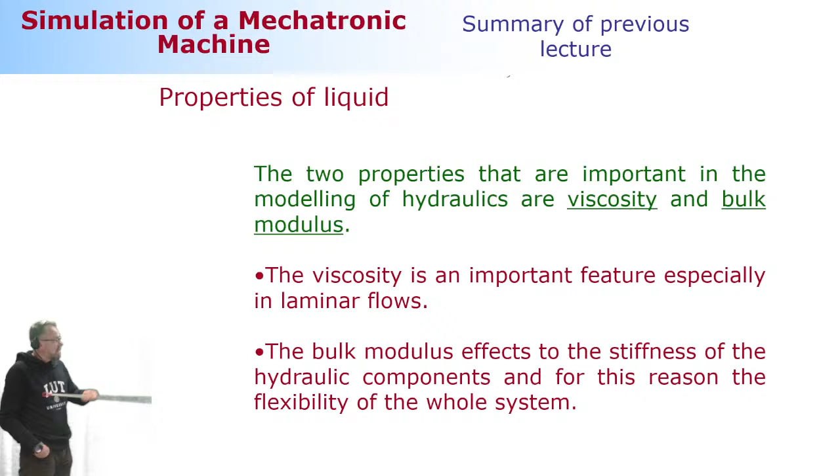The viscosity is only important if you have a laminar flow. We discussed the bulk modulus, completing this by first looking at a unit size container. We realized that the bulk modulus is a ratio between the pressure difference versus the volume difference. As the volume gets smaller, the pressure gets bigger, the volume difference being negative in sign.

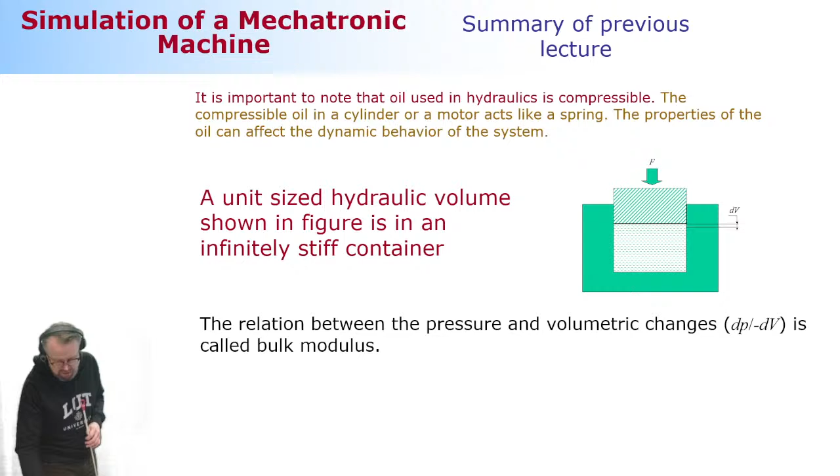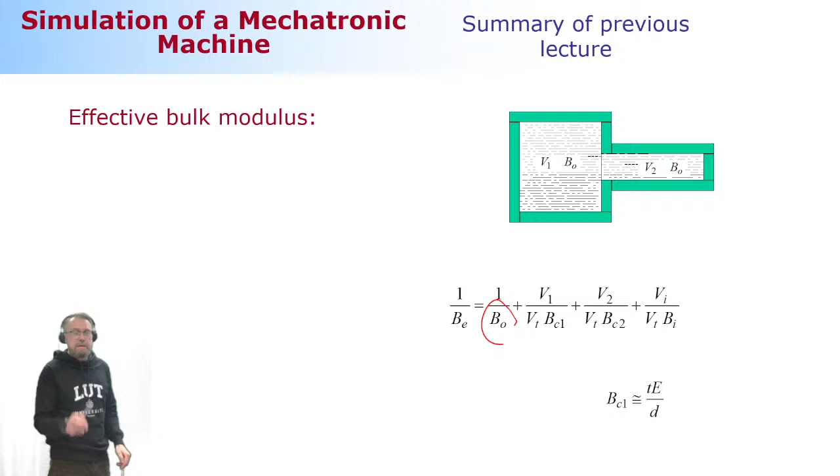When you try to generalize this to any size of volumes, and take multiple volumes simultaneously into account, you can compute something called the effective bulk modulus. The effective bulk modulus takes all the sources of flexibility into account. You can compute that, in a case like two containers shown in this figure, by first taking into account the flexibility of the fluid. This is actually a function of pressure and temperature, but it's very often assumed to be a constant value.

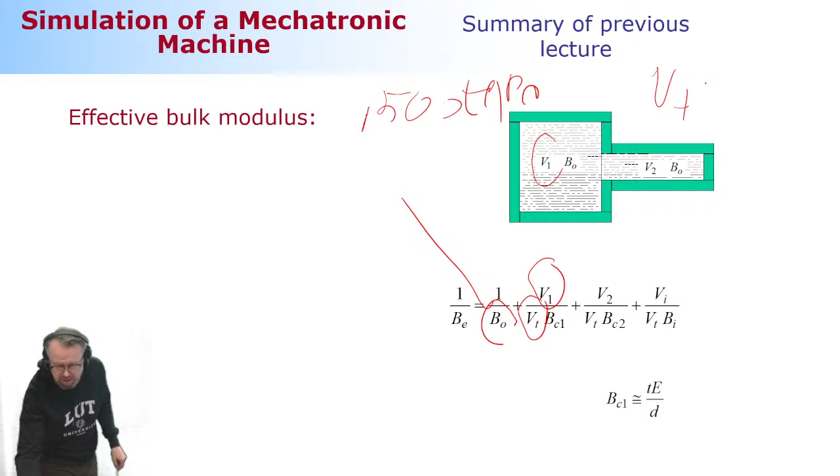So it's going to be 1,500 megapascal, which is a typical amount of bulk modulus that is being used in simulators. Then you have the next component, which is the size of volume 1 versus the entire volume of the system you look at. Entire volume is going to be volume 1 plus volume 2.

Right, and then you're going to take this flexibility of the first container into account. If it is a steel-made container, like a hydraulic cylinder, you can make an assumption by using this very simple equation where you have diameter of your cylinder, wall thickness, and the elastic modulus. This is going to give you a rough estimate about the flexibility of your container. Okay? Then you have a second container, so you can do the same.

And then finally, you have here how much dissolved air you have. This is the hard component to estimate because in reality, it's almost impossible to know how much exactly you have dissolved air in your system. But this is something that you can give a shot and try how much effect it's making.

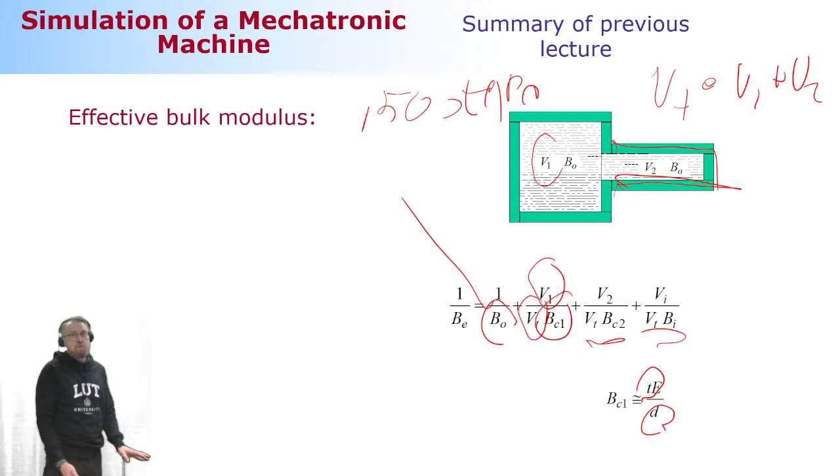And one thing that is not mentioned here, if this container is not steel made, but is like a rubber hose, that is typically the one that is reducing the effective bulk modulus very significantly. And here was an example of how much exactly that is reducing.

This experiment is such that this y-axis here is effective bulk modulus. But look at the numbers. So this is megapascal, and this is like 800, 480 megapascal, so it's reducing quite significantly. And this is because of the hoses itself. Hoses, even though they have a steel net, they're introducing quite a bit of flexibility to the system.

And if you have a desire to make your hydraulics more rigid, one simple way to solve the problem is to reduce the hose lengths. This is one thing that helps you. Sometimes you need to play a little bit with the Eigen frequency associated to hydraulics to make sure that they don't overlap the same region as the natural frequency of mechanical structures. Then you can play with the hoses and so on and so forth.

Yes sir, do you ever want a bouncy system with low bulk modulus? So when can I need the low bulk modulus? When does that happen? When you want, is it ever wanted? Ah, that's a good question. Yeah, that's a good question. I get emotional here because we have communication. We have a great level of friendship here, do we? No hugging, I keep it at level, but it's a fantastic question.

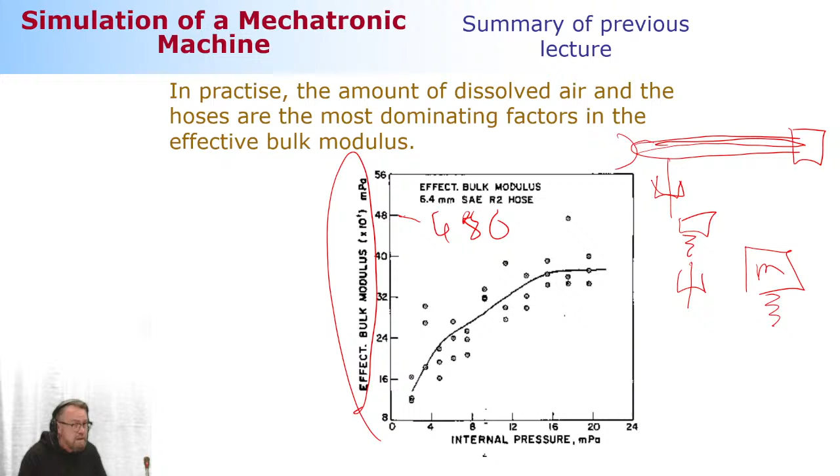Okay, so you might have a system like this, so let me put it here. If you have a simple crane like this, you have a mass at the end, and then you have a cylinder here, this is your hydraulic cylinder. Because of the flexibility of this mechanical component, you could simplify this structure in the sense that you have a hydraulic cylinder, and then you have a spring here and the mass. Now, when you look at this hydraulic cylinder, I'm going to make one more drawing here. This is going to be the mass, then there's a spring, this is a mechanical spring, this is what comes from the flexibility of this simply supported beam.

And then you have here a hydraulic cylinder. Let me describe the hydraulic cylinder in a way that there is actually a piston, and this fluid here is a spring, and here there's another spring. Now this is one flexibility as a total that is coming from hydraulics, and this is the one that is coming from the mechanical component. Now the big problem could happen if the frequency of the hydraulics is in the same area, same neighborhood, as the frequency of the mechanical flexibility.

So one needs to go another place. So which one can go? Okay, flexibility of the mechanical structure, probably there's nothing you can do about that anymore because it's already an existing structure, so you cannot touch that. So the one that needs to go, one needs to move away because they don't get along well if they're in the same region, is the hydraulics. So what you can do for hydraulics, you can either increase the flexibility or decrease the flexibility.

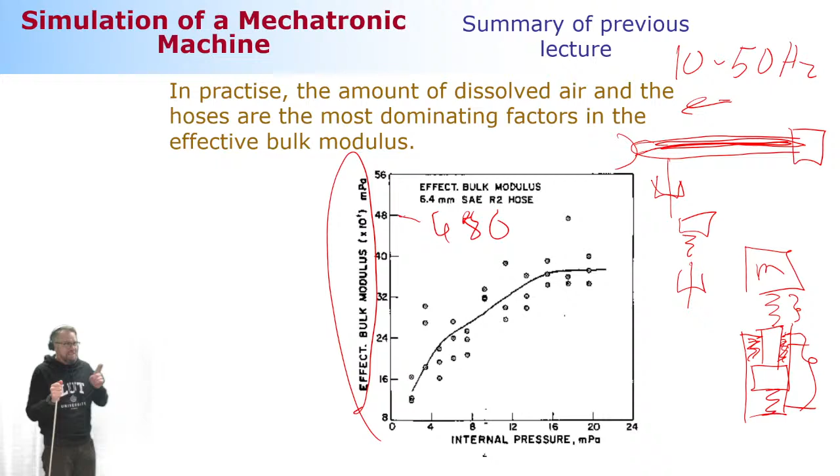Really nice. Let's look at the natural frequency business a little bit. Let's go back to this example we looked at a little while ago, with the difference that now there is no mechanical spring. This is just a mass on top of the hydraulic cylinder. It's almost like the example we looked at before, except this mechanical flexibility is assumed to be non-existing. So it's only the flexibility that comes with the hydraulics.

Now, how can you compute the natural frequency of a system like this? The natural frequency is always a relation between the stiffness and the mass. Stiffness we need to figure out one way or another. Mass is going to be very simple in this case because here it is. This is our mass. So the only thing we need to figure out is how is the stiffness.

We know that the bulk modulus is closely related to stiffness. How can we compute this in a way that it actually is a spring coefficient, the way it is needed in this equation to compute the natural frequency? Stiffness, we know, is the ratio between the force and the displacement. That's the definition of stiffness.

So if it's about the ratio of force and displacement, let's look at how we can compute the force changes, how we can change the force in this system. Now comes something I haven't explained earlier, but it's good for you to be aware of: the force produced by this cylinder will be computed as a force that tries to push this upwards. This force is the pressure applying on the piston side multiplied by the corresponding cross-section area. That's the force moving the system in this direction. So this force is simply P2 multiplied by A2.

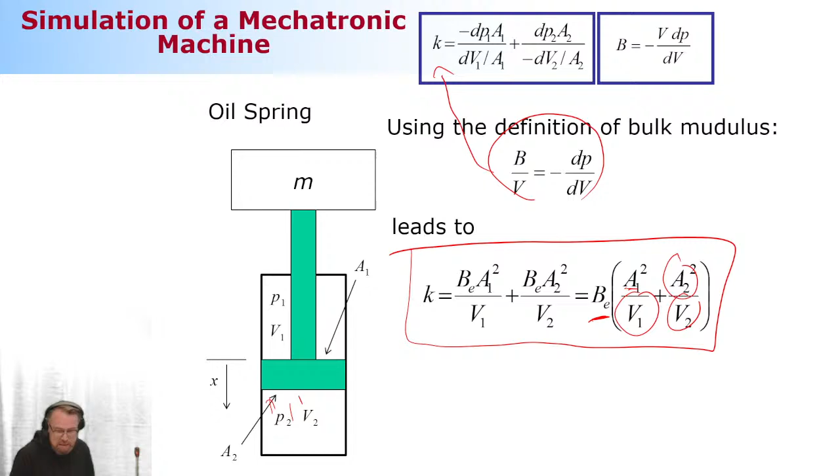Here is the effective bulk modulus, the one that describes the flexibility. Then I have the cross-section area that corresponds to the piston rod side, and the cross-section area that corresponds to the piston side, along with the corresponding volumes. This is how you compute the stiffness, and that's how you compute the flexibility. You simply take this value we computed, put it here, take a square root, and you can compute the natural frequency of the system.

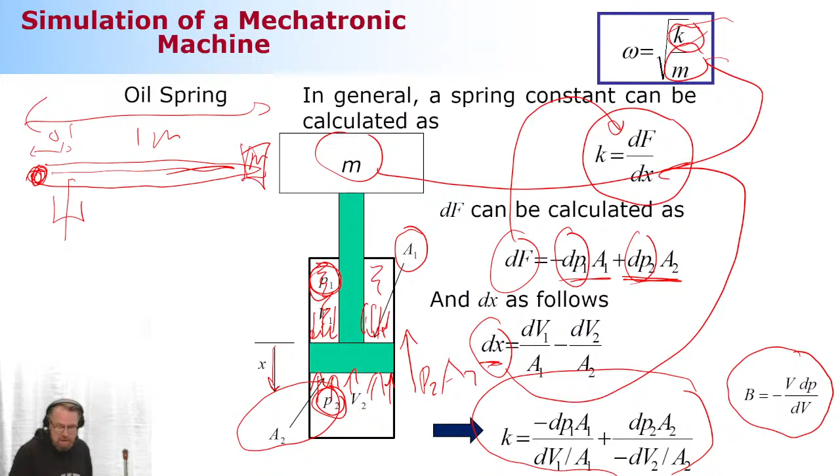Here's my question to you, first in class quiz. Bulk modulus in hydraulics describes: force produced by a cylinder, flexibility, compressibility of hydraulics, oil amount in a circuit, or number of components in a hydraulic circuit. Only one is correct, but which one is it?

So what does our YouTube say? Not YouTube, but the WhatsApp chat - is the WhatsApp going hot? Not yet. No one is saying anything in the WhatsApp. Are they saying what the WhatsApp community is voting for?

B. So they're voting for B. Somebody has a high level of self-confidence voting for B and making it visible for other students. Can you think about this a little while and we get back to this momentarily?

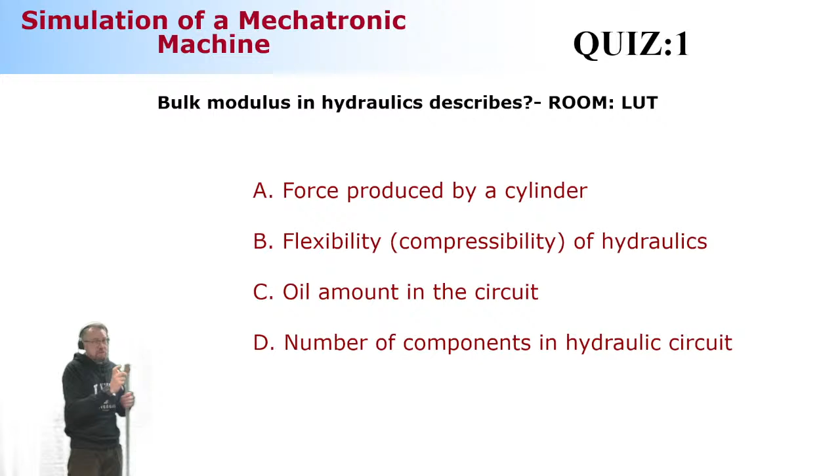One thing that I did not mention when I started hydraulics a week ago is extremely important: you need to understand the drawing symbols of hydraulic components. I assume this is all clear to you, but if not, this is going to be a little difficult. We don't touch that many components though.

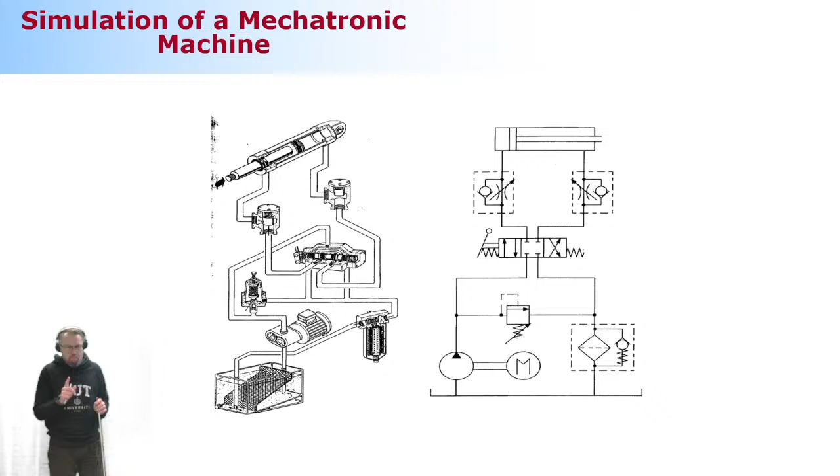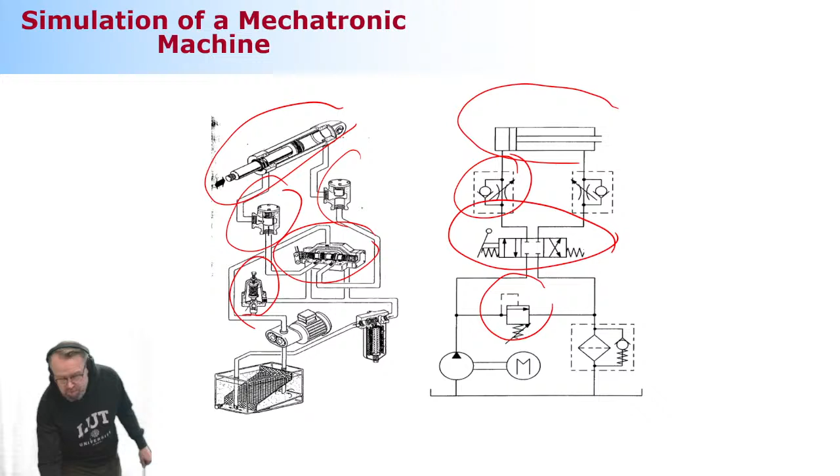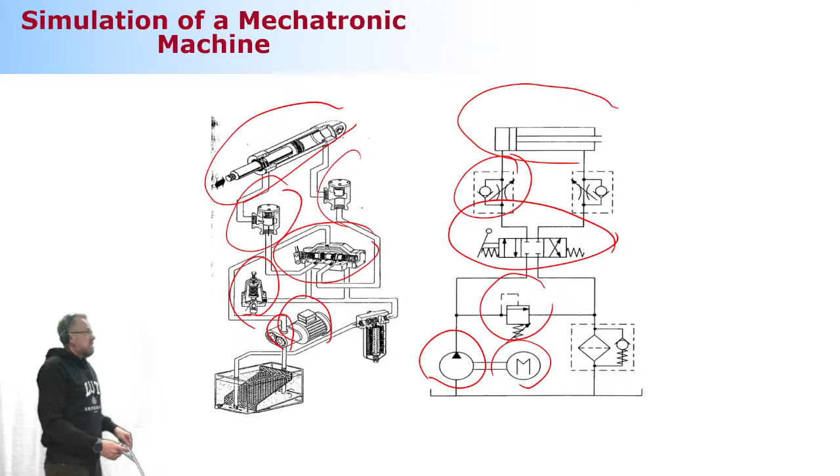When we say hydraulic cylinder, which physically looks like this, we draw a symbol like this. When we look at a direction valve that physically looks like this, we use a drawing symbol like this. These are the symbol throttles - they look like drawing symbols like this. This is a pressure relief valve, going to be this guy here. Pump looking physically like this, drawing symbol like this. Motor is looking like this - is this one. So that's how we're going to play the game: we don't show how they physically look, but instead use these drawing symbols.

Shouldn't be too difficult. If you're feeling shy about that, you can take a look at any literature on hydraulics you want, and it will all become clear in no time at all.

The last thing we need to touch before moving on to the most important subject matter in hydraulics is viscosity - not important. Why? Because the viscosity only comes into play when you have small pressure differences through the orifice or throttle, which is not common, particularly in mobile machinery and mobile hydraulics where pressure differences are lots, for sure more than 10 bars. Then it's safe to assume the flow type is going to be turbulent flow, not laminar flow. We'll touch the different flow types later in my class, if not today then next week.

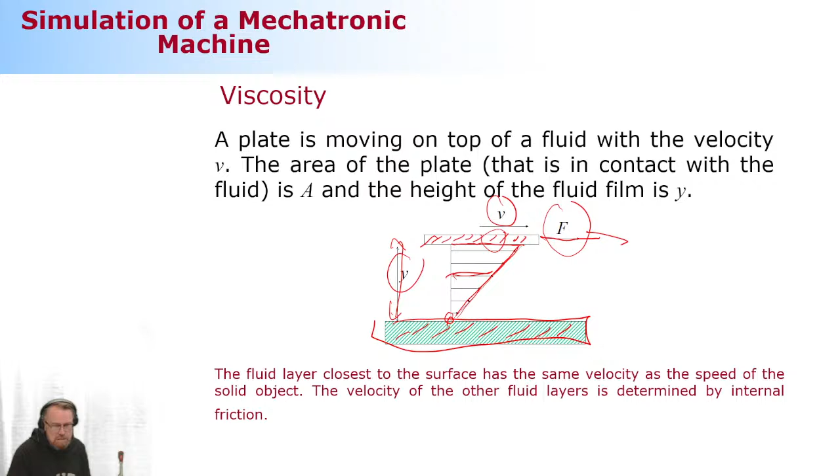Now what we're going to do is when we start to look at the closure, we're going to pay close attention to the force itself. Of course, the force that is needed is coming from this equation.

In this equation I have the cross-section of the plate, the velocity that I'm running, and how thick my fluid layer is—how much fluid I have between these two objects: the one standing still and the one moving with velocity.

And an additional component in my equation is the absolute viscosity. This absolute viscosity describes the friction property.

It's pretty much how much this fluid is collaborating with you. If you need very little force, the fluid is collaborating with you—not resisting much about the motion. Whereas if it's very thick material, you need a lot of force to drag this plate at a certain velocity, because the particles and the viscosity are fighting against you, trying to resist the speed as much as they can.

This one here is viscosity—that's what we're looking for. When we're looking for the viscosity, typically we simplify this equation by getting rid of the cross-section of the plate and the force itself.

That can be done by using the shear force. This comes from the strength of structures—copy-paste. Shear force strain is force divided by cross-section. When you do that, you can write it like this.

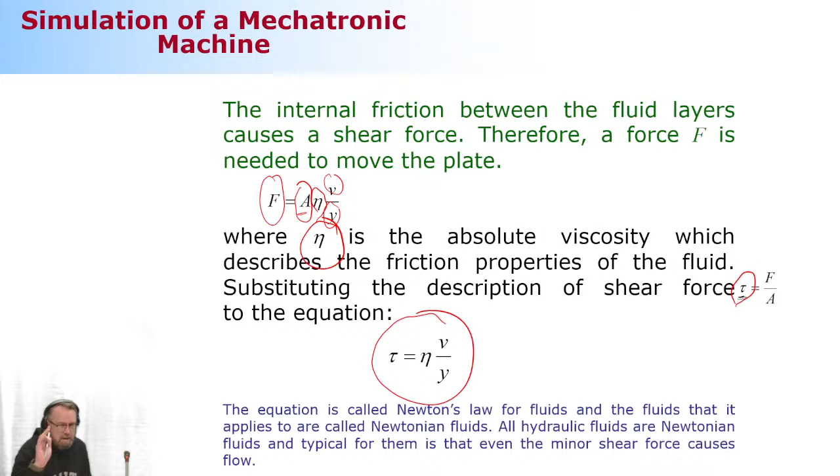Now, absolute viscosity is not really being used—it's something you don't typically find in the literature. So what is used instead is called kinematic viscosity, which you get by dividing your absolute viscosity by the density of your fluid. That's something we can actually use.

It's not often used this way. When you want new oil for your car, for your braking system—well, I'm not sure about the braking system, but at least for changing your car's oil—you typically look at viscosity using something from the Society of Automobile Engineers, and they use units associated with these SI units, like the cSt shown here. This is the one that's very common. When they say 'I want oil from 0 to 30,' they're referring to the Society of Automobile Engineers rating.

But when you do the simulation, it's better to use SI units. This unit conversion is something we're going to discuss a little later—it's a bit of a headache in the modeling of hydraulics.

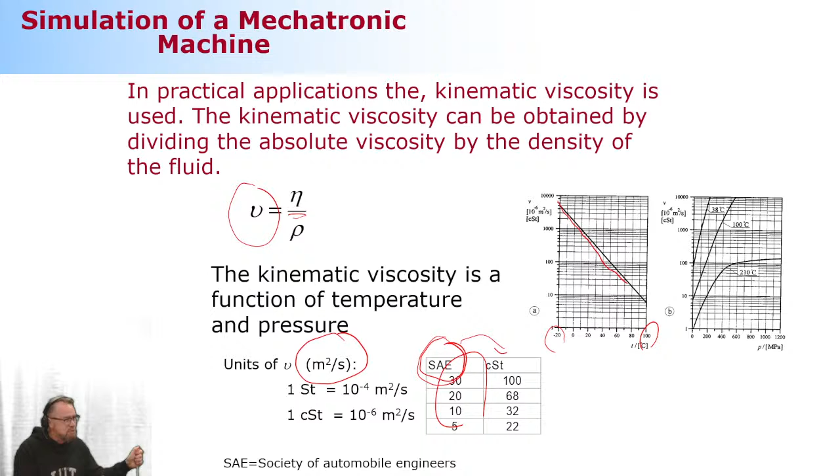So those of you doing car racing or something need to make sure your engine is warm, because the viscosity of the oil changes radically depending on temperature. Once the engine is warm enough, then you can do this famous 'put the pedal to the metal'—I'm sure you've heard that before. Okay, so that's it.

And now comes this lumped fluid theory. Any questions? Anything you want to discuss about modulus, spring coefficients, or viscosity? Or should we take a look at the lumped fluid theory and then discuss? Or should we take a look at the in-class quizzes, how we're doing in that?

So it's going to be 100%. I hope not, I hope not. It's getting late, so I don't want to call the rector at this time of the day.

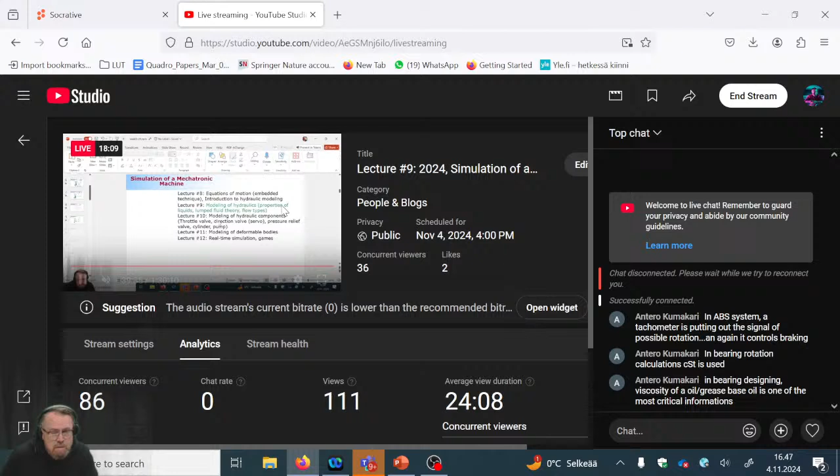Major drop. So we came down from 120, or was it 130 students, to 117 students.

What's up this week? Is something special going on? Come on, these guys in class are saying it's because of the snow. If this is a reason not to study, then Finland is not a good place to study, I can tell you that. So regardless of the weather condition, you always come, because saying it's unpleasant weather and I cannot study, oh my God.

Guys, look, the next time you're gonna see the sun, it's gonna be March, I can tell you. And seriously, once you see it, many of the new students will be calling 911, which in Europe is not the 911, asking what the heck is this thing out there in the sky. The answer is: it's the sun. Take it easy, yeah, it's just not gonna happen that often.

From this on, we're gonna dive in. The daylight is getting shorter rapidly, very rapidly. Okay, success rate is gonna be what? 90? It's gonna be 100. Yes, sir, it's gonna be 100 today.

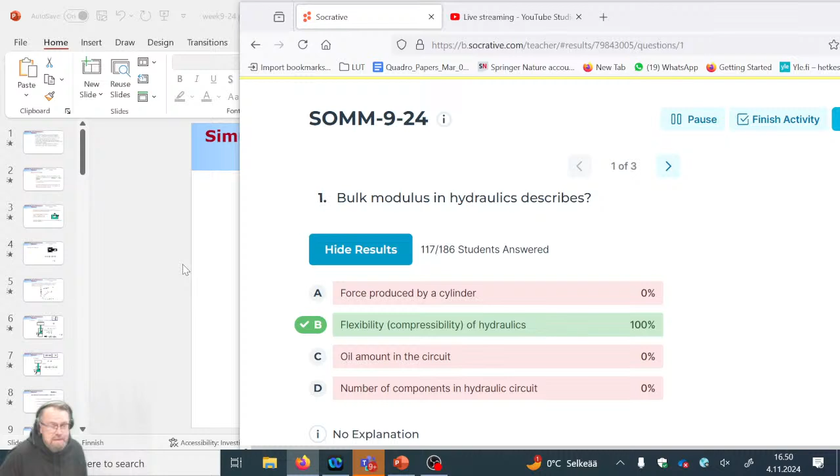Okay, so I say: can I call? I'm in the middle of the class and my students would like to say you something. It's delivered, it is delivered, but I don't know if he can take it. Okay, so let's wait and see if he reads the message. Not yet read. Okay, so we continue as soon as I see that he's seen this message, I'm gonna give him a video call.

Because, where is it now? Of course, to show that we are able to score 100%. All right, ready for that? Still not. Do you think about how he's going to take this? He's going to be happy to see good students, high-level students. Okay, so this is where I need to put this back, not this.

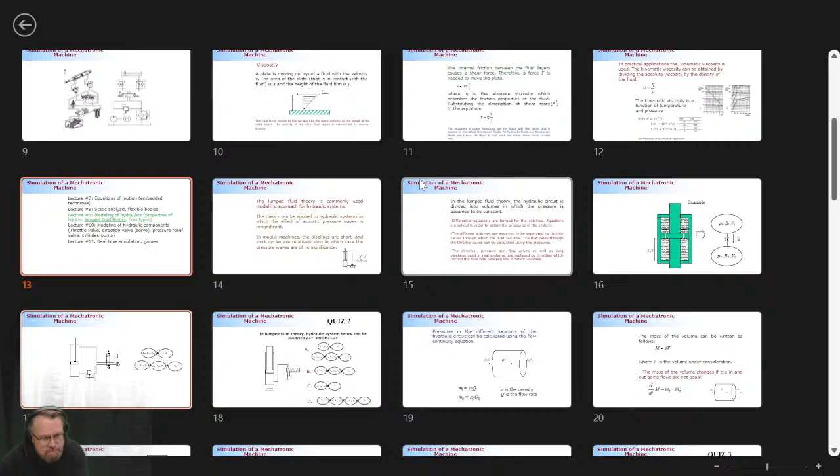Okay, lumped fluid theory, lumped fluid theory - I think it would be quite a bit of fun. Maybe I'm too bold to say it's fun to call the rector, because maybe he's not going to like getting calls since it's no longer office hours - it's 4 o'clock when office hours end in Finland. Lumped fluid theory is the core of the modeling, it's what we really need to look at when we want to model the hydraulics. This is a good method, relatively simple and quite accurate, but it cannot take acoustic waves into account. That happens sometimes if you have very rapid hydraulics capable of opening and closing throttles very, very rapidly.

If this is going to be... I don't know if this is him or not. I think I'm not going to take this phone call, but I'm going to call him back once we have a break.

Okay, so in mobile machines, the pipelines are typically quite short, and work cycles are relatively slow. This is no longer fully valid because, remember, there's something called digital hydraulics. Digital hydraulics changed the game a little bit - not too much, but there's now a possibility of acoustic waves. So what are these waves? It's basically like what we discussed earlier: if I'm speaking here, the waves travel from my mouth to your understanding system, your brain, because of the waves. The same kind of waves can take place in hydraulics - when you stop something very rapidly, these fluid pressure waves can travel back and forth, but typically things happen slowly.

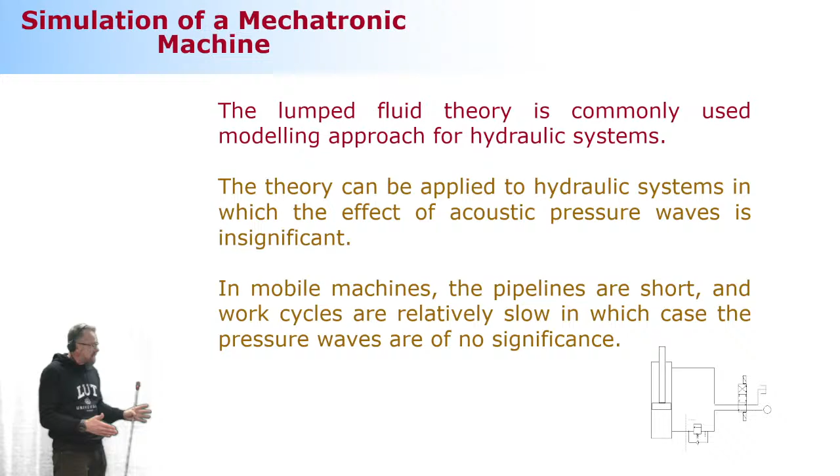When you do that, the waves are not there, so the vibration is not happening within the fluid. But in theory, this is something that can happen. This method is not able to capture it.

Okay, how it goes. So like I said earlier, we can form differential equations that describe each of the volumes. What you need to do in the beginning is divide your hydraulic circuit into volumes. How do you do that? You assume that in a certain area of your hydraulic circuit, the pressure is equally distributed, because in this area you're computing the pressure using one differential equation only. So that's where the assumption is actually coming from.

It's quite natural. This selection, this discretization procedure is not very complicated. It's actually very straightforward when you look at it. Now, each of the volumes are separated by throttles or other different kinds of components. Actually, it doesn't matter what kind of components we're looking at. We're always assuming that there's a simple adjustable throttle that differentiates one volume from another. So that's the way it goes.

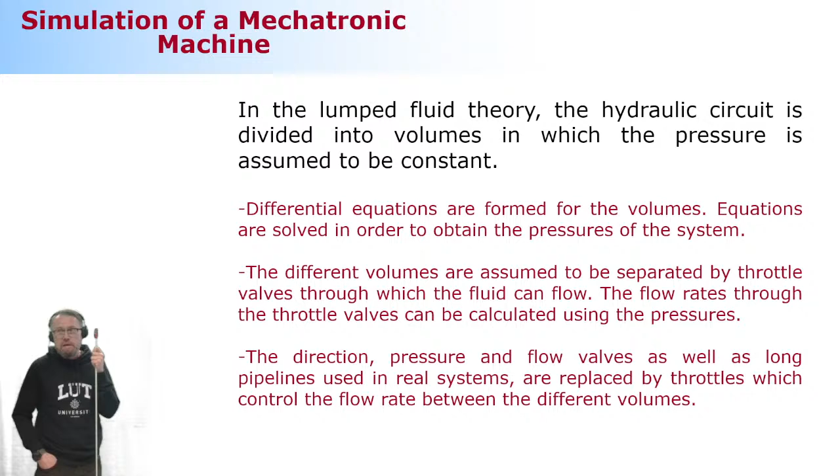And I'm momentarily going to show you examples. All the components, direction, pressure, flow valves are assumed to be variable throttles that are changing their diameters based on a function of different kinds. That's the concept behind it, and we're going to practice this multiple times.

Here's a damper, a fluid damper, where there's two containers: the container that is on the lower side and the upper side. And the question is, can we assume that the pressure here is the same as here?

No, we cannot. Because what's going to happen if you take this damper body, attach it to ground, and press this downwards? The pressure here will start to increase. Pressure here will start to decrease. And then what happens because of the pressure difference? There's a drilling that connects these different volumes together. The flow starts to equalize the pressure difference, and it's doing that with a certain delay.

But if I press it as hard as I can, there's a pressure difference. The pressure difference causes the fact that I have to compute the pressure in the lower side and upper side separately, because it's not a fair assumption to say that the pressure is all the time constant in both sides. They will eventually be the same because of the drilling here that tries to equalize the pressure difference, but because of the inertia of the system, because of the delay, it happens not immediately, but after a little while.

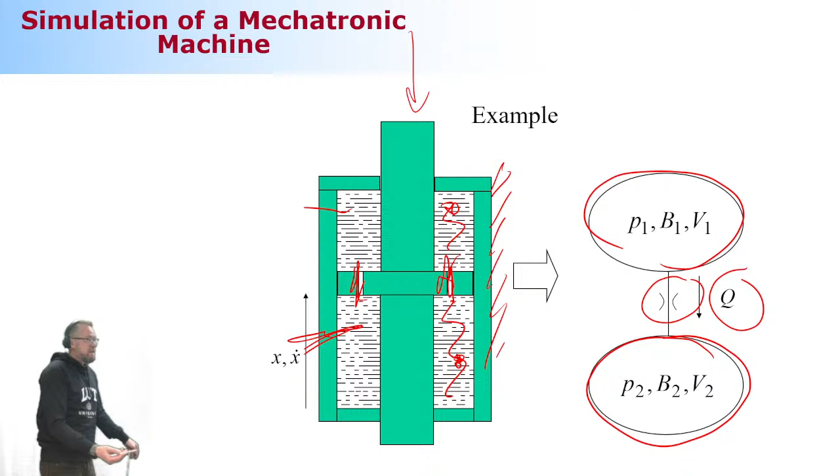The shimming system is quite complicated, but basically that's the way it works. So the drilling here is a throttle, and the flow tries to equalize the pressure difference. How much is the flow? It depends on the pressure difference. Depending how big it is, the flow can have two different types: laminar flow or turbulent flow. Typically, when we are looking at these things, it's going to be a turbulent flow, and then the viscosity has no role whatsoever.

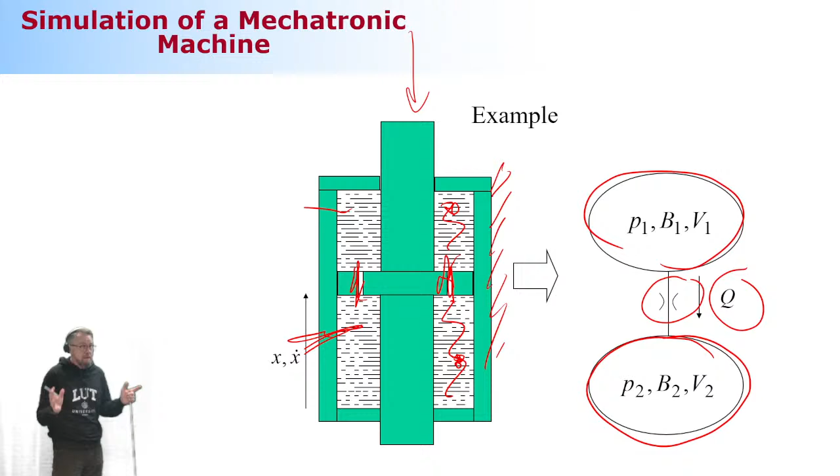Makes sense? You're still with me? Okay, so let's continue then.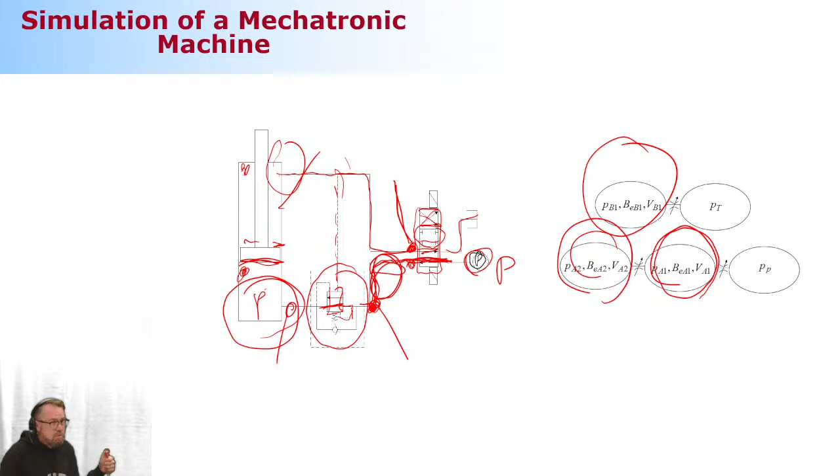So to compute this, you need a differential equation here, which corresponds to this area. You need a pressure here, which corresponds to this area, and a pressure here, which corresponds to this one. The force produced by the cylinder will be the pressure here multiplied by the corresponding cross-section area of the piston, minus the pressure here multiplied by its corresponding cross-section area. Makes sense? So all we need is to get this differential equation to compute the pressures, nothing else. Then we're ready to go—we're good to go. So what do you guys say? Makes sense?

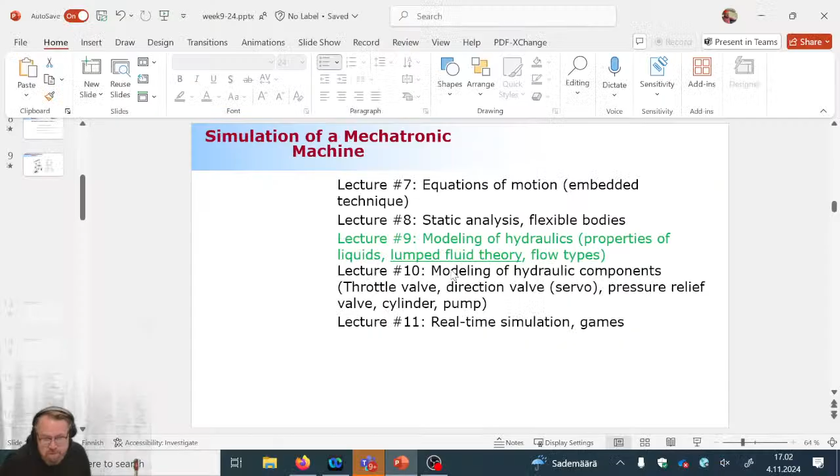Oh, it's not on. Okay, sorry about that. Next.

Okay, we got 225 students. So the last ones—only six of you decided this is no longer for me, that you don't want to be part of this class. I don't think that's very bad when you look at the percentage, because usually the dropout rate is much bigger than that. I don't know what the usual dropout rate is for lectures. People usually follow—first lecture is 100% participation, next lecture it's like 75, 50, 25, 0, that's a standard thing. So we still have a very high percentage.

Oh yeah, you cannot see this. Okay, sorry about that.

Let's take a look at this. Here's my proposal: let's look at this in-class quiz, and then we'll take a break. After the break, we'll do one thing only—we're going to look at the lumped fluid theory, and that's going to be your differential equation. This is what you need to understand, how it behaves. Otherwise, you have no hope.

Okay, what's the WhatsApp community saying this time? C. C. No comments from my side.

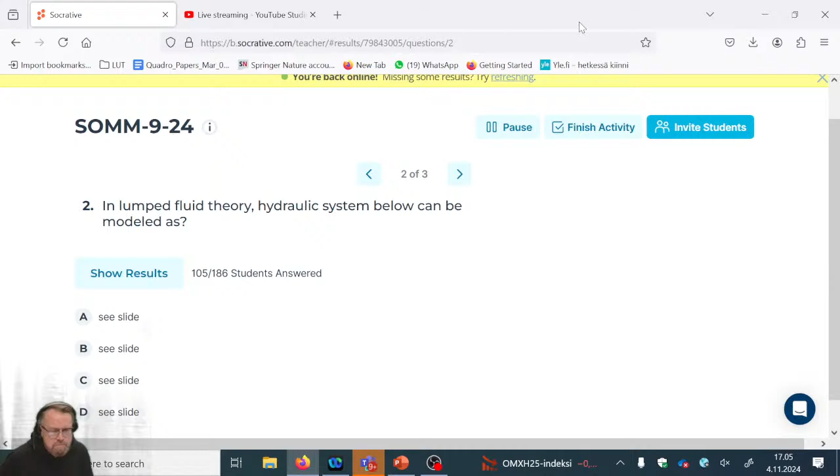Okay, we got 105 answers already. 106. Last time I think it was 114, or what was it? Roughly that much. And then 110, so I think that we are pretty much there.

So I'm gonna close this momentarily. Okay, are you guys still thinking, is it making sense to vote? How are you gonna cast your vote? You ready to cast a vote? You're done? Okay.

Okay, we got all the answers. So the correct answer is, of course, C.

Oof. This WhatsApp system is killing me. What if who's going to cover it if I'm going to get a heart attack? Is it going to be the WhatsApp community? I don't think so. They're going to be just having fun with a high score, and they don't care about the consequences. This is really hard on my heart.

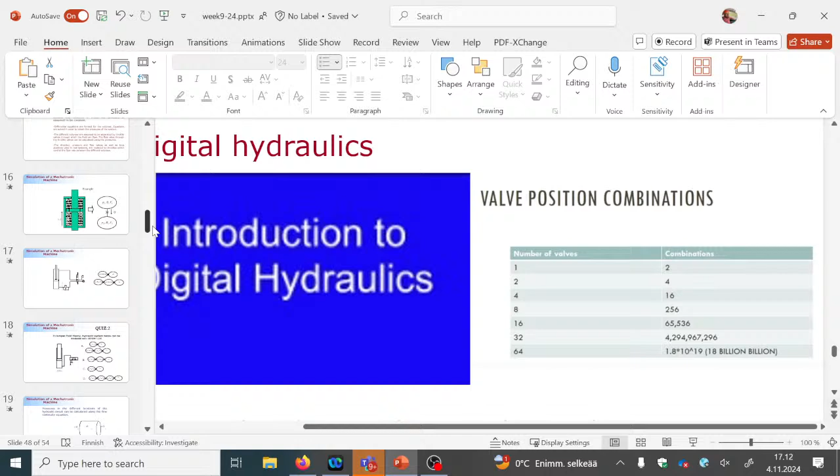Are you guys serious? Okay, all right, so I'm gonna tell you what's up with digital hydraulics next week and why it makes sense, because it makes sense. There's a big promise, let's put it this way, there's a big potential. And the big potential is because the hydraulic circuit always works like this. Let me take myself back to where you were. So the typical scenario of a hydraulic circuit is pretty much shown here. Okay, I got the message.

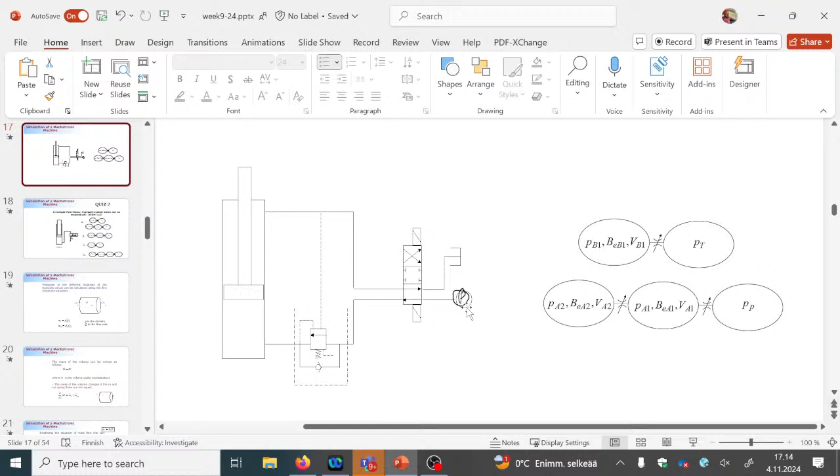Okay, so let's ask, so he's alive. Okay, let's see, okay, now typing. But where the heck are the results? Now we lost the results. Can we go back here? Ah, we don't have it anymore. Oh God, show the results. Where do they show the results? There, show the results, 100%.

Oh, this is what we need to show him. If he says yes, but if he's saying no, he's thinking. Okay. This seems to take forever. Thinking.

Is what? Oh yeah, his face is missing. That is correct because I did not put my camera on, so I'm back here.

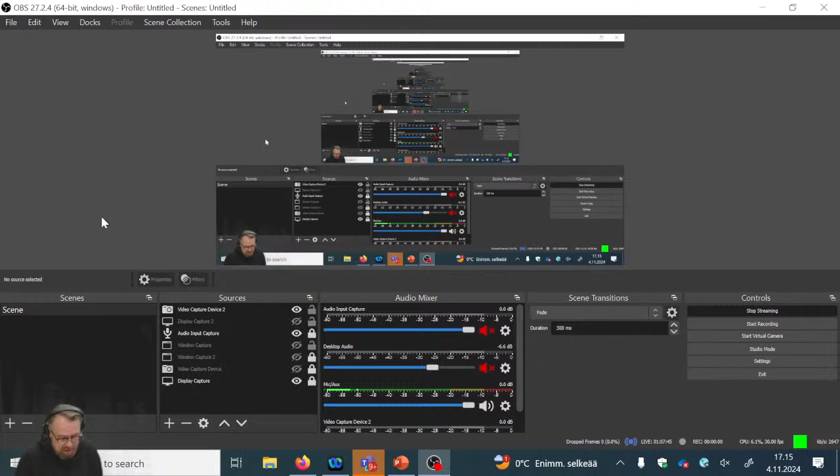So let's see if we're gonna get this. No, not responding. Please, Juhis, say that we can call you. Oh, there's this way that I can have also this FaceTime. FaceTiming. Okay, he's not playing with us. I see that, okay, what are you gonna do?

All right, but I was about to explain this. You know what you do in hydraulics is that you always have a reserve of energy because you might or might not need it, and that's what hydraulics is based on. It's like there's always a little bit of excessive amount of energy available.

Okay, so he's, let's take this back. Okay, FaceTime. I don't know if you guys can hear this. No, not responding right now.

Hello, here's the deal, boss. So I'm here in the lecture with 128 students, and we've been thinking, what if we're gonna have an in-class quiz, and if we're gonna score 100%, meaning that every single one can answer this question correctly, what can we do? And they say you need to call the rector. That's exactly what I'm doing here. Look at this, I don't know how well you can see it, but it is 127 students, each of them scoring 100%. And we are here and online on YouTube.

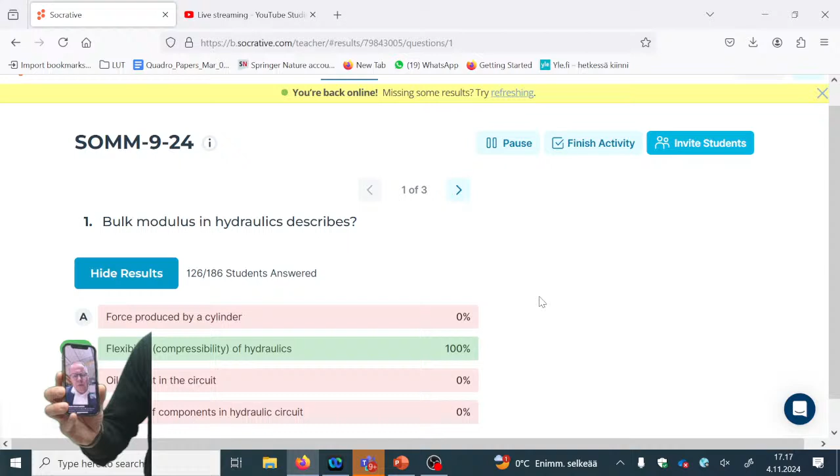Thank you for calling. As I mentioned, I'm eating my kebab. So he's eating his kebab. Very nice, it's an excellent kebab today, I would say. Okay, enjoy your kebab. We continue with our hydraulics. Okay, thank you, bye. Juhis, bye, bye.

Okay, so I made it as promised. So what do you guys think? Cool, I think so too. Look, the rector is answering, he's almost...

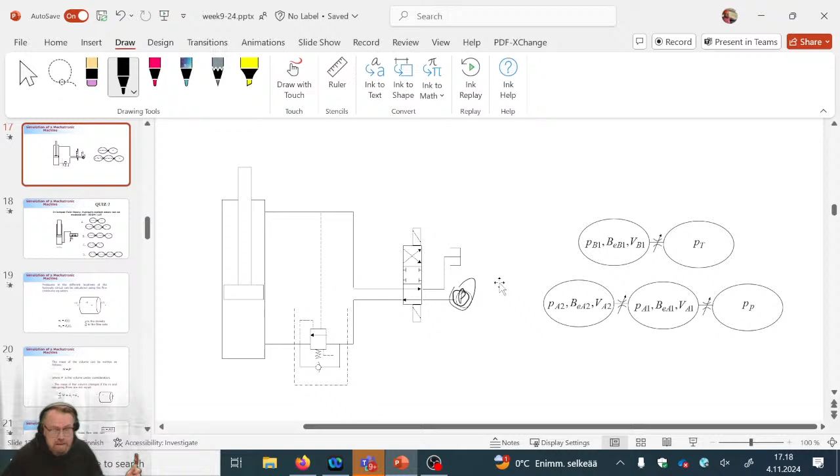It's already more than 5 o'clock, so it's no longer office hours, for sure not. Oh my God, a special lecture today. Very special one.

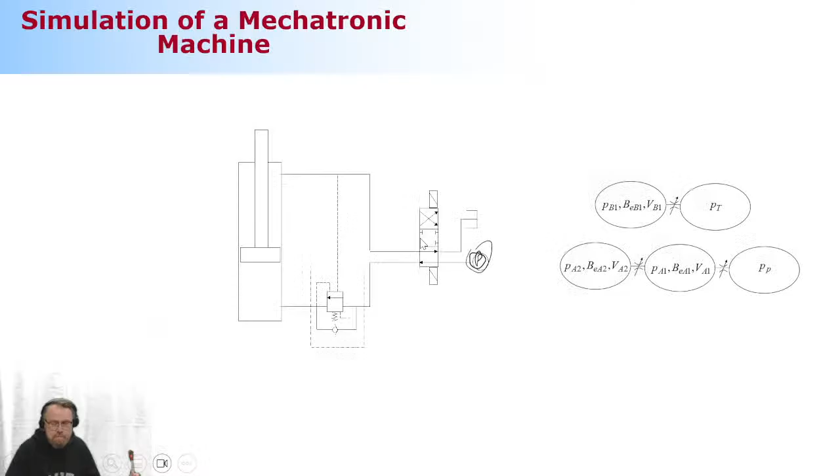Okay, but next we need to do this. We need to get back to this. So this is what we're gonna take a look at. We did that already. Okay, so here's how we're gonna derive this first order differential equation.

This is not gonna be too complicated at all. So what we need to do is start looking at the control volume. There's a volume where we're gonna be focusing on. And when you look at the volume, there is a mass flow that is coming into the control volume.

Mass flow is going to be equal to the density of the material that is coming in multiplied by the flow rate - how much material is actually coming in, and what is the density. The material flow leaving is going to be the same, except it's associated with the mass flow leaving out and the density corresponding to the material that is leaving out.

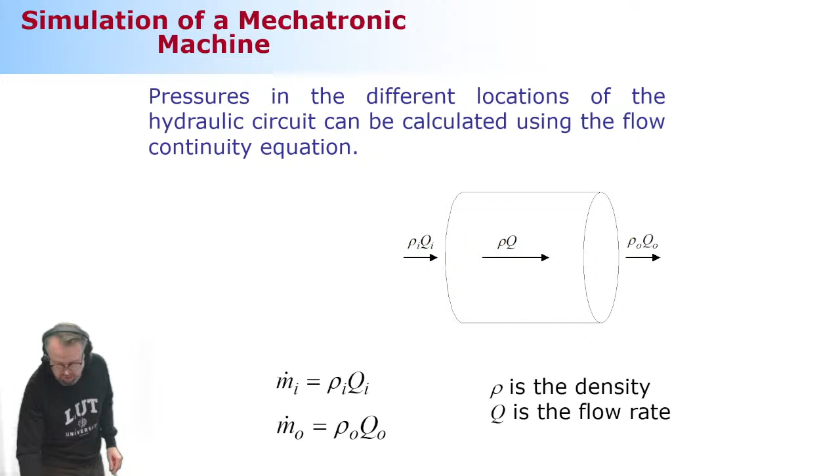The one within the control volume is this one here. So that's what's going to be within the control. Now what we need to do is look at how much mass is within the volume. That's simple - we just need to know the density of the material we have there and the size of the volume. That's clear, that's what we already learned when we looked at multi-body system dynamics.

So no difference whatsoever. Now, how can we change the mass here? Because here we actually can change the mass. How can we do it? So if the incoming and outgoing mass flow are not equal, something is going to happen.

If there's more stuff coming in than leaving, mass is going to increase. The other way around, if there's more stuff leaving than coming in, then it's going to decrease. So that's how we can play with the mass, because it's the mass within the control volume. So the mass change is about how much in, how much out - it's a simple thing like that.

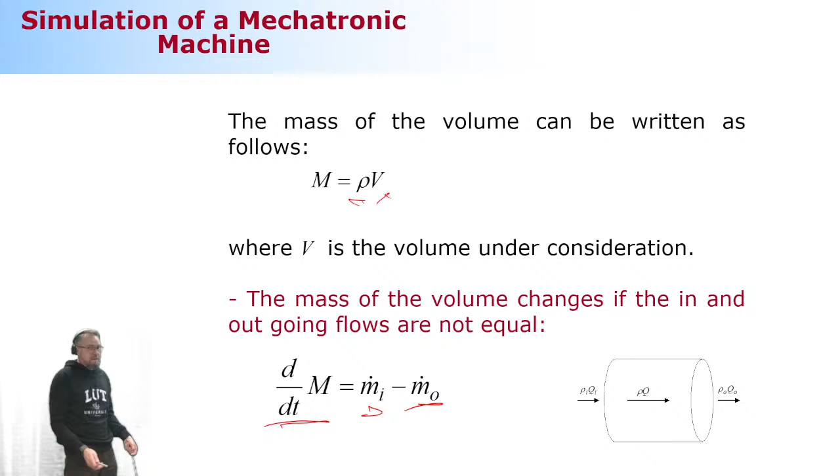Okay, now when I'm using this previous notation about the mass flow, and using this density multiplied by volume as my mass, then I can write the equation like this. Now I have this differential operation, so I need to differentiate with respect to time, density, and the volume. And then here, this side of the equation has no changes whatsoever.

So when I do this differential operation, I have here density change as a function of time, and volume change as a function of time. And when I do this operation, using the assumption that the density of the incoming and outgoing material is the same - because if we're speaking about oil, the density is not going to change radically, at least not radically - we can make a safe assumption that density is all the time the same. So with this assumption, we can write it like this.

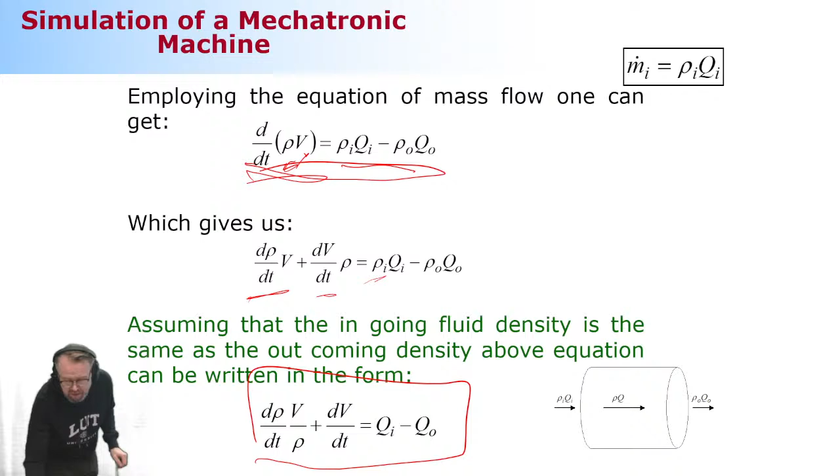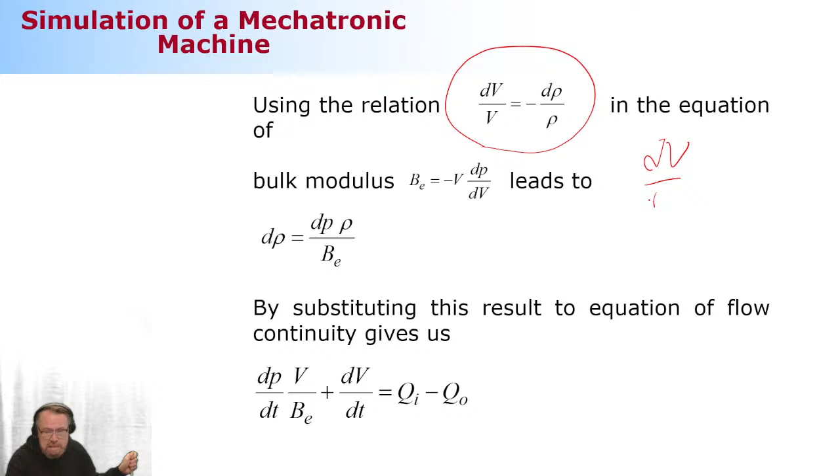We are not yet there, because look, we still have a density that we are playing with. So we need more information. And we can use this relation that comes directly from the math, the density and volume relation. Once we're using this kind of relation, this is basically saying dV divided by d rho, so it's going to be volume versus density. It's going to be like this - that's essentially what this is saying.

So once we're using this definition, along with the friend that we learned already a week ago, which is a definition of bulk modulus, we can write this change of the pressure, change of the density as a change of the pressure. And now we become very close to where we want to be.

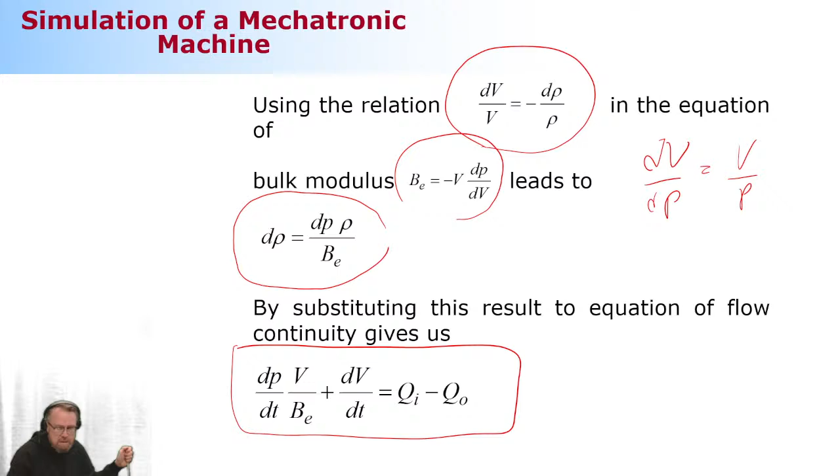So this is how it's going to be written. And now when I'm moving everything except this differential operation to the right side of the equation, here's my first order differential equation. This equation says P dot, which is not the pressure, but it's a P dot, which is not a big problem for us because from P dot we can integrate P, okay?

And from P dot, it can be written as effective bulk modulus divided by volume. Then there is a flow rate in, flow rate out, minus change of the volume. Change of the volume is like when you have a hydraulic cylinder, on the piston side, you can have this volume that is changing radically depending on where the piston position is. So that's how you can actually compute the pressure at any given time.

What do you need to know? Of course, you need to know this effective bulk modulus, which is describing flexibility, like we all know that. Every single one of us knows that, including the rector. So we're safe, we know what that is. This is a volume size.

We know that too. This is a flow rate in. We have not discussed the flow types or the volume flow itself, but that's flow rate in, flow rate out. And how is it that we can change the volume? How is that change of the volume taken into account?

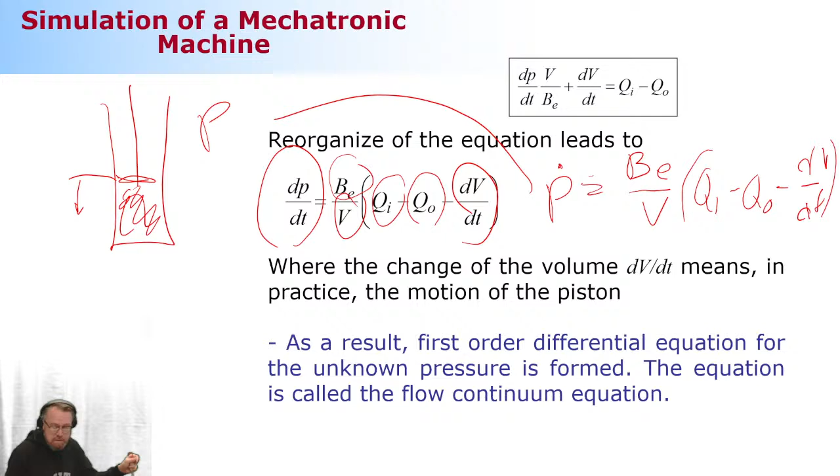How do you guys think about this? Not bad, it wasn't bad at all. There's something that the lumped fluid theory is not taking into account.

Pressure waves, is that something that is not accounted for? Size of the hydraulic volume.

Look, I'm going to write this equation one more time. So I'm going to write this equation like P dot going to be.

You guys missed it big time because we just called the rector, and the rector wanted to have a list of the names of all the participants, and you guys were not here, so you're off the list, because he wants to come and hug you. Okay, so let me get back to this one.

And then there was an in, out, and let me explain one more time. Flexibility, volume difference, volume change, flow rate in, out, that's it.

So one thing is not mentioned. Which one is not mentioned? What is the sub-community saying? Pressure waves. And does it come with 100% certainty or a little less than 100%?

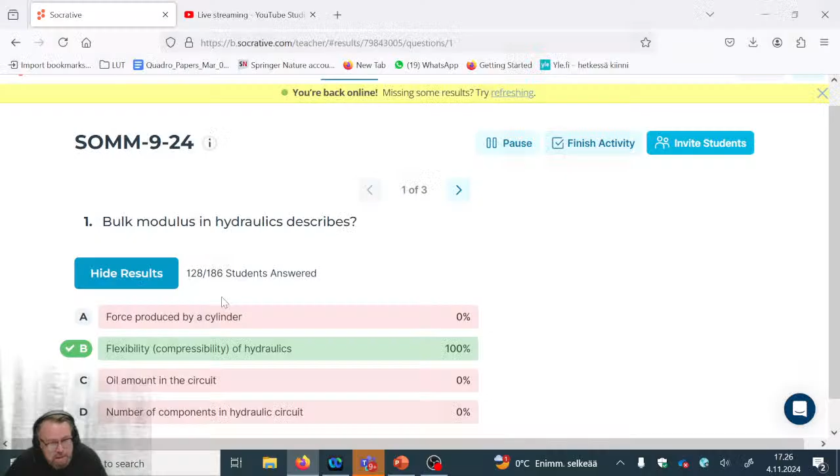So the Socrative poll is not open, but it's going to be open. This is what we did already. This one. Okay, so is it what?

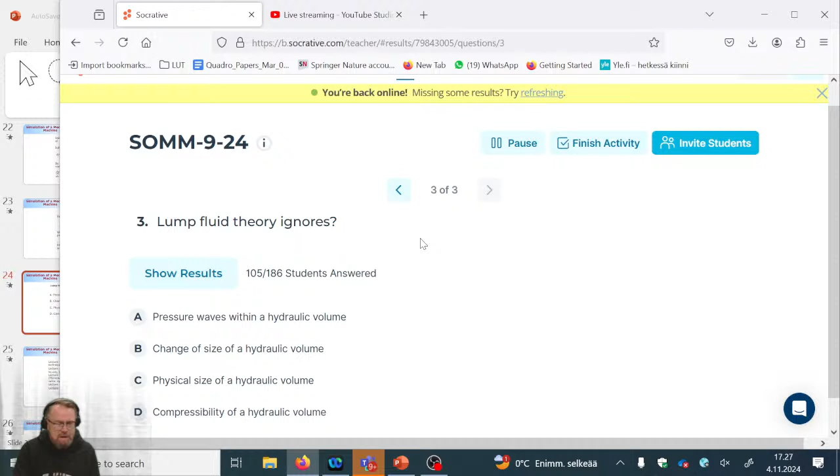Okay, so it's 90, 100%, 105, 100, not 100%, 100 participants, 110, 114. So you guys think it is 100% again? No. Is it what? We'll see, we'll see, how we got 115 answers.

99%. How come, is it, people can join in this WhatsApp community? Is it like you voting first in a WhatsApp? Or somebody just saying, I know for a fact that it's going to be B, and then others are following? How does it go?

Ah, okay, okay, that's what it's like. Want to be a millionaire? This TV show, you can ask from the audience, and the audience votes for A or B or something, and you just follow the crowd. Oh, okay, makes sense, makes sense.

Okay, we got 100, oh look at this. So we're back where we were. So we got 120 something, almost 120 answers. That's really good, that's a good sign. That's a good sign, 120.

Good, so we're going to show 100% yes or no. Yes, no, so it's yes and no. Most of you are saying no. Okay, let me take a look.

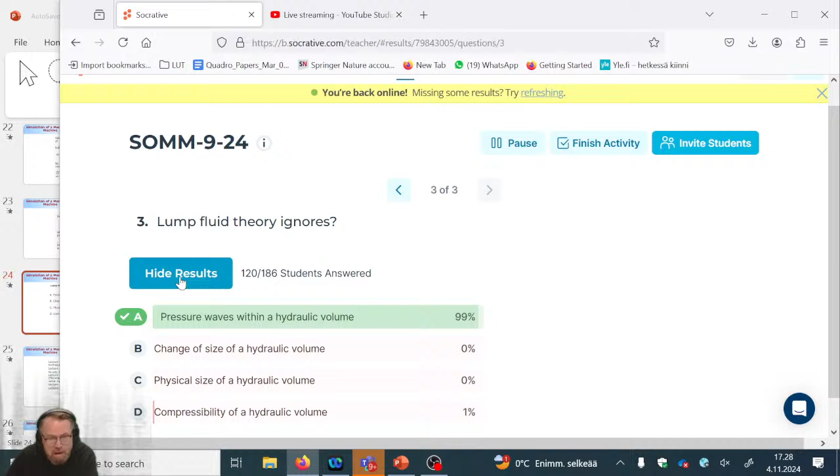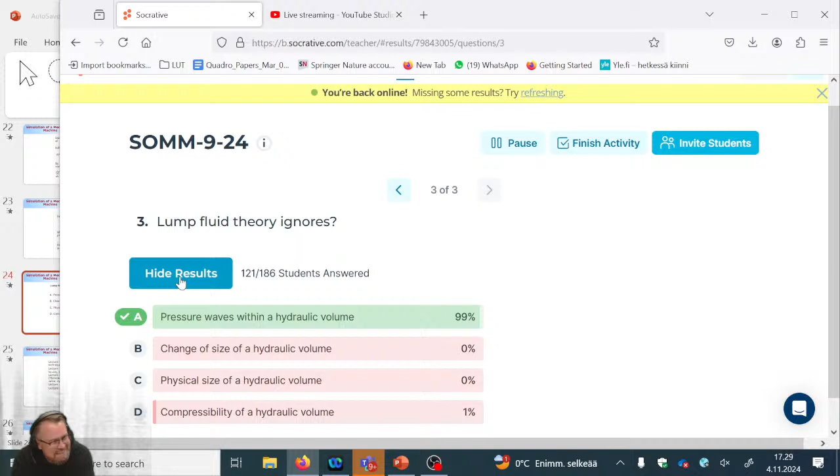Oh my God, I need to figure out something else because honestly, I think the rector is willing to play with me once, but if I keep on calling him like a couple times per day, soon he's going to say, okay, not cool, come to see me in my office. All right. Thank you, Mustafa, for voting incorrectly. Yeah, exactly.

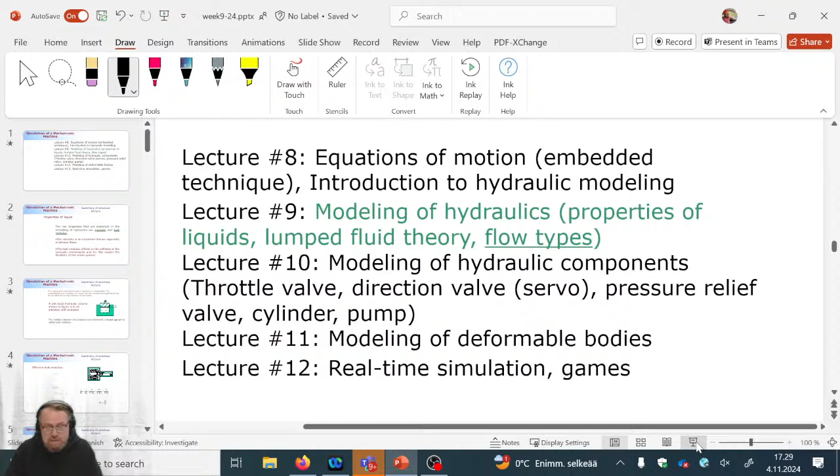Oh, okay, this one, now I got more energy. I'm not feeling that much tired anymore. So I'm going to still, even though I promised, I'm going to still briefly. This is annoying. So this is what they would like. I think that they should fix this because now I need to do this, and then I need to do that.

Why is it displaying incorrectly? What is that, I need to change the settings here. Is it Windows P? What should I press? So it's a duplicate. Okay, so it was a duplicate.

All right, last matter to discuss, because we covered the lumped fluid theory so fast. So it's gonna be flow types, different kinds of flow types.

So we have, like mentioned earlier, laminar flow and turbulent flow. They're not going to change from one to another just like that, but there's a phase that is unclear what it is. These two flow types have completely different behavior.

Why is it doing this? Now, again, I need to get started from scratch. How does it look for online participants? Is it good? Okay, I just need to make sure you guys see this well. Okay, we all good. No, it's back.

It's back, okay good. So there are two different types of flows, and their behavior is completely different. They're different in how the particles travel. In a laminar flow, which takes place when the pressure difference is small, traveling is like this.

So if I have a throttle here, there's a pressure here and a pressure here. The pressure difference can be computed simply as P1 minus P2. It's not too complicated.

In a case of laminar flow, the fluid particles travel with good order, with no disagreement whatsoever. The particle goes smoothly. It's well organized, there are no traffic jams, no accidents, no collisions, everything goes smoothly. That's laminar, which takes place when the pressure difference is small.

But as soon as P1 starts to increase, the particles become in a hurry. You know what happens when you're in a hurry? Like traffic with 4 lanes going down to 1 lane, and every single car wants to go at the same time into that 1 lane. There's gonna be a lot of accidents, a lot of whirling.

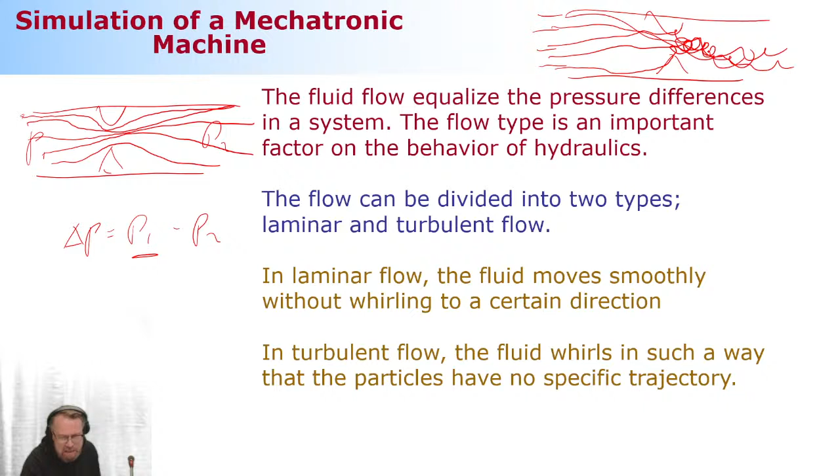If the particle is traveling like this, it's called whirling. It's still not the rotation of the particle, but the particle goes in a whirling path. This is a typical scenario when the pressure is high, because the particles are so much in a hurry that they're no longer capable of going in good order. Every single particle wants to go at the same time, which is not physically possible, so whirling takes place.

This is the case when the pressure difference becomes high. What's high, what's low? Roughly speaking, laminar flow takes place when the pressure difference is less than, let's say, 2 bars. More than that, it's going to be turbulent.

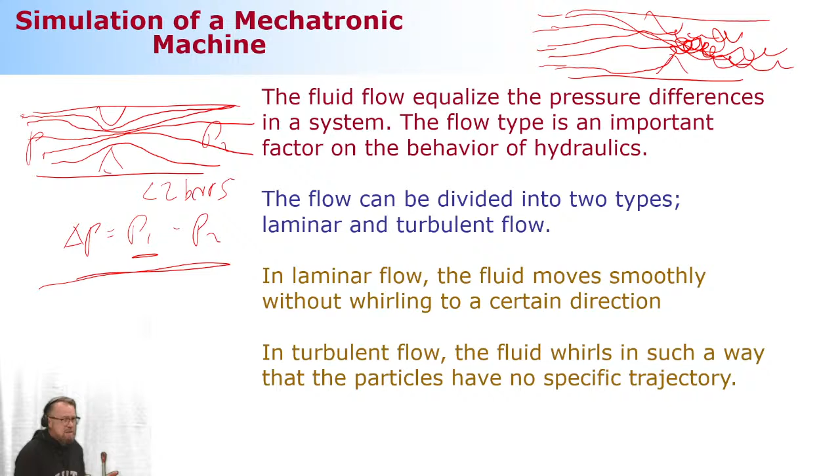Of course, it's not just first laminar and then turbulent, but there's a certain region that is unclear what exactly it is. There's a number that helps you define what it is, and I'm sure you have seen this before — it's called the Reynolds number.

I don't think we really need to use this, but for your information, if it's unclear whether it's laminar or turbulent, this would be the way to compute it. For modeling perspective, typically what we do is simply assume everything to be turbulent. Turbulent flow comes with one big numerical problem, which I'll explain later.

In the numerical solution perspective, it makes sense to model the region close to the small pressure difference as laminar. Not that it makes much difference in terms of performance, but simply because it's more pleasant in terms of computing. So I was about to explain this — there's a very unclear notation because Reynolds number is a function of what?

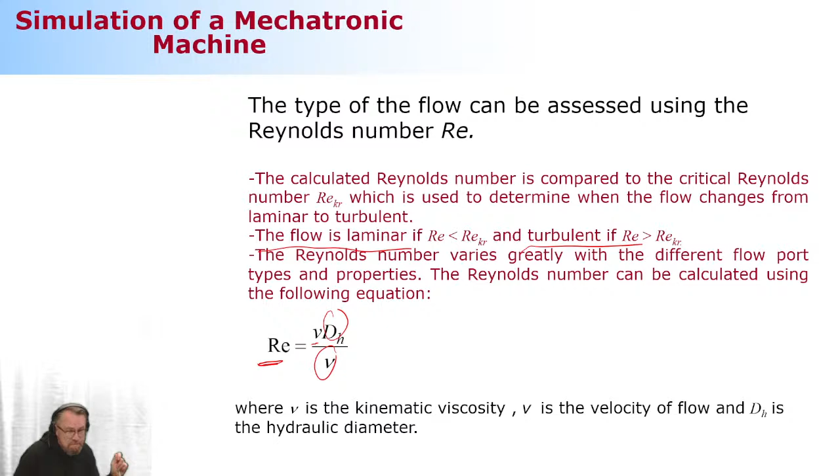There's an area that is both, or a combination, let's put it this way. But that's okay, because from a modeling perspective this is a minor detail. It doesn't make much of a difference. All right, here are the two types.

What makes a difference for us from a modeling perspective is that in laminar flow, the pressure difference and the flow rate - how much material is coming through this throttle - are linearly related. So there's a linear relation, and this linear relation is defined by a coefficient called CL. How can you get that? You can get it from pre-calculated tables, but what matters is that this relation keeps being linear all the time. That's something good to keep in mind.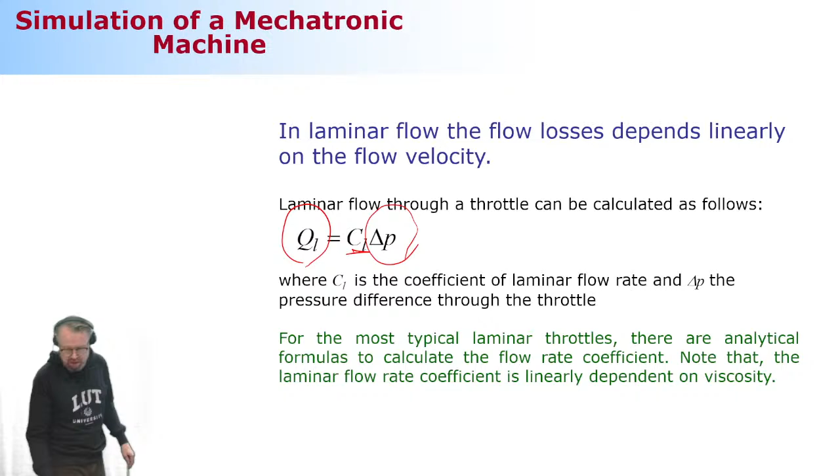Now let's look a little bit at examples. Here are a few different kinds of drilling systems, and of course complicated equations are needed. Don't get confused about that, because eventually what matters is this relation - this relation is linear.

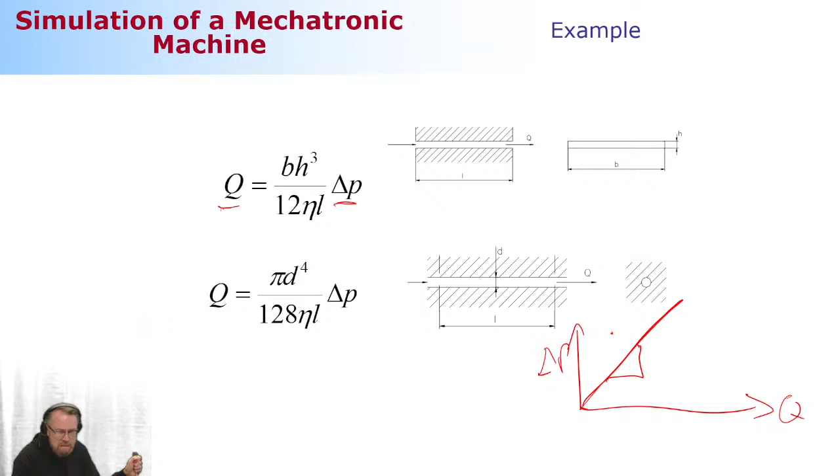So if you make a plot such that this is the flow rate, and this is the pressure difference, it looks like this. This angle is defined by these numbers. What are these numbers? Well, of course, they depend on what kind of throttle you're dealing with.

This is something that actually looks very - I don't know how you can manufacture a rectangular throttle, because this is a rectangular cross section with a length of L. What kind of drilling system can you use to make a rectangular hole? I don't know, a little bit theoretical I would say. At least I'm not aware of how you can drill a rectangular hole.

Do you know how to do it? Because I don't think you can do that in real life. But anyway, so you do? You know how to do it? Yeah. How? Through that electro EDM spark machine. Ah, a copper electrode of rectangular size.

Let me correct - I don't know how to do these rectangular holes in my garage. You can do that if you have a machine shop, but in my garage I don't have a device like that. I have a lot of different tools, but not one that can make a rectangular drilling. But I can make a circular shape, that I can do, that's not a big problem. I can have my drilling system make this. And if you have a circular shape, it's going to be diameter to the power 4, and so on and so forth. None of that stuff matters.

What matters more is this relation - that's what is very, very important. Look, we have this good friend of ours, the one we met a little while ago, viscosity. That's part of the game. So viscosity makes a difference, but only in this case.

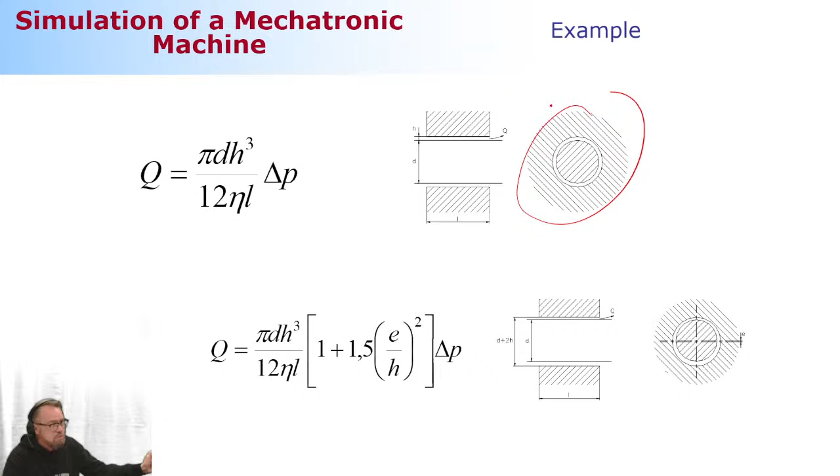Here's another example. Again, in my garage I don't have a device to do this. Do you? And when I'm thinking about drilling this like a circular, rim-shaped hole, what's going to happen to the middle part? How can I keep the middle in place? It's going to drop down, go away I think. So I don't think this is well designed.

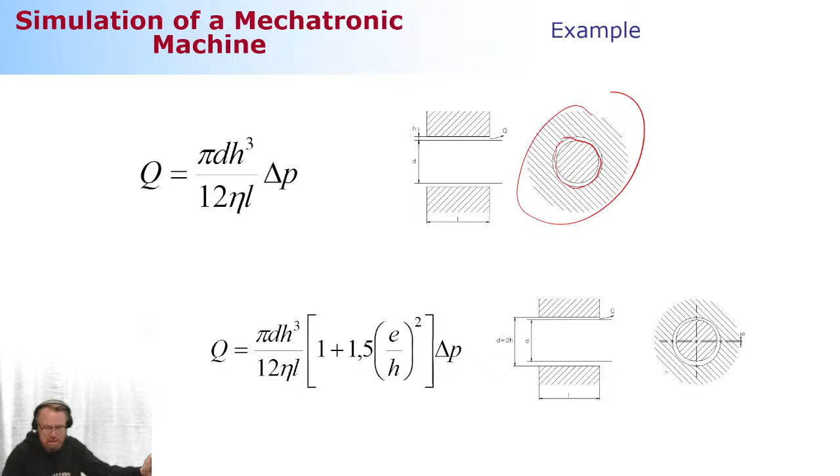But anyway, that doesn't matter - these are coming from pre-calculated tables, so let's not look at how you can do this in reality, that doesn't matter. Okay, next: turbulent flow. Turbulent flow - again, what is important for us is the relation.

Flow and the pressure difference are quadratically related. This is important for us.

Let me make this drawing. I'm thinking of drawing it so that pressure difference is on this side and flow rate is on this side. This is a quadratic curve, so it's going to be like a second order curve, like this.

I mentioned there's something numerically unpleasant about this. Why? Because we're doing the prediction based on tangents, which are clear and make sense. But as soon as you approach the position where there's zero pressure difference, the flow rate is supposed to be zero too. Since the prediction is based on tangent, the tangent here becomes infinite.

It's not able to understand well that when the pressure difference is zero, the flow rate is zero too. So it makes sense that when the pressure is small enough, let's say 2 bars, you take a linear line from this point all the way to the origin of the curve, which is zero pressure difference, zero flow rate.

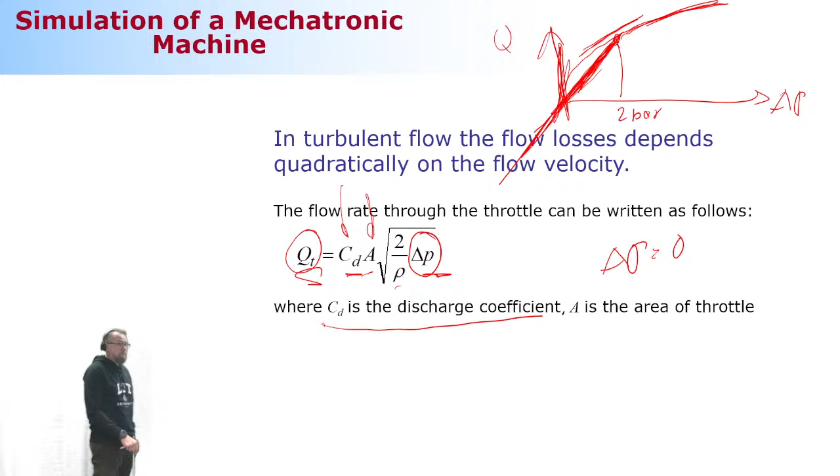Guess what? Guess who is the father of the method called semi-empirical modeling method? He's a professor in this university, in the best department in this university. How can I give you more hints? He's Heikki Handroos, seriously. He's the father behind this.

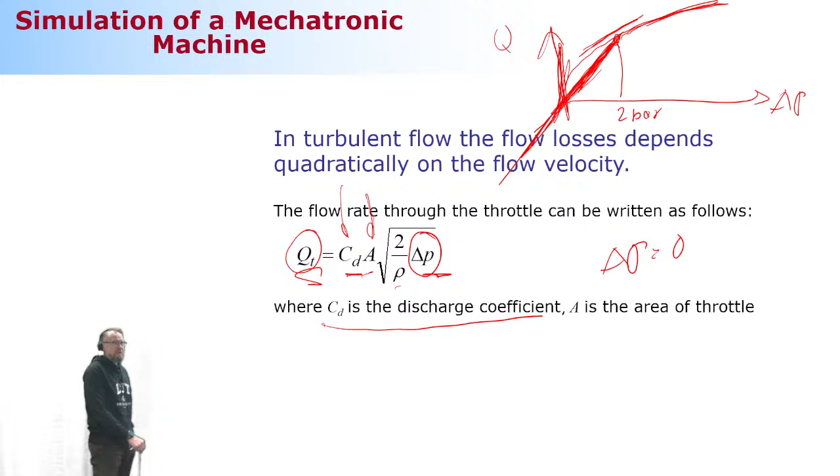Think about that - he's a forerunner in modeling of hydraulics. So he introduced something based on a semi-empirical approach. Why? Because it's okay, it's kind of doable to get all these parameters.

But in the real case, the parameters you really need become huge, enormous. Some of the parameters you don't really have access to, even though they seem simple, you still can't get access to them any other way than taking the real components, cutting them in half, and measuring. But that's against the concept of virtual design, where you do nothing in real life. Particularly, it's not a good idea to purchase a brand new component and the first thing you do is destroy it. Not a good idea.

So he created a method where all these unknown parameters can be obtained from simple measurements - something combined that you can get from a manufacturer's catalog. Manufacturers tell you a little about the features of the components, and that's where you can get access to these parameters. You don't exactly know what is what, but that doesn't matter.

What matters is whether this relation between the pressure difference and the flow rate is linear or nonlinear. If it is nonlinear, these parameters can be updated in a certain way. What is this way? That I'm about to tell you next week. So the story continues.